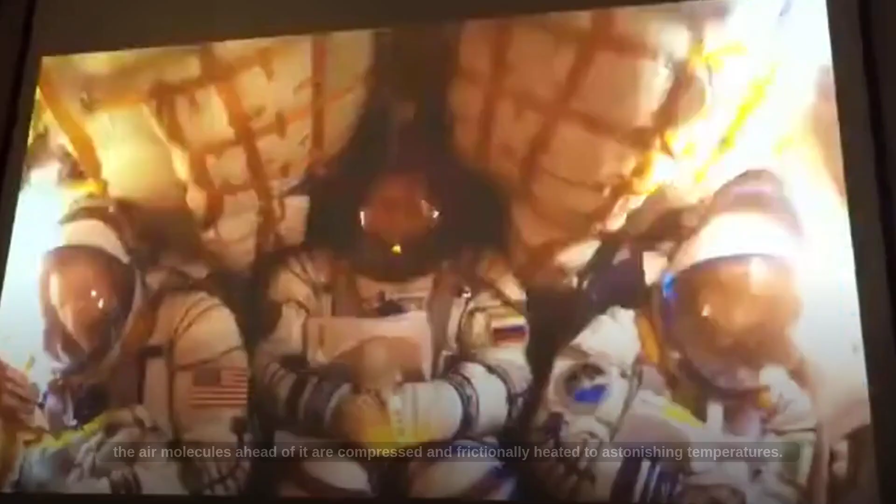Reaching such speeds is not just about raw power, it's about confronting an invisible, yet formidable, barrier: extreme heat. As an aircraft hurtles through the atmosphere at Mach 5, the air molecules ahead of it are compressed and frictionally heated to astonishing temperatures. This isn't just surface warmth, it's an intense thermal assault, capable of degrading and destroying conventional aircraft materials in mere moments. The air itself becomes a furnace.

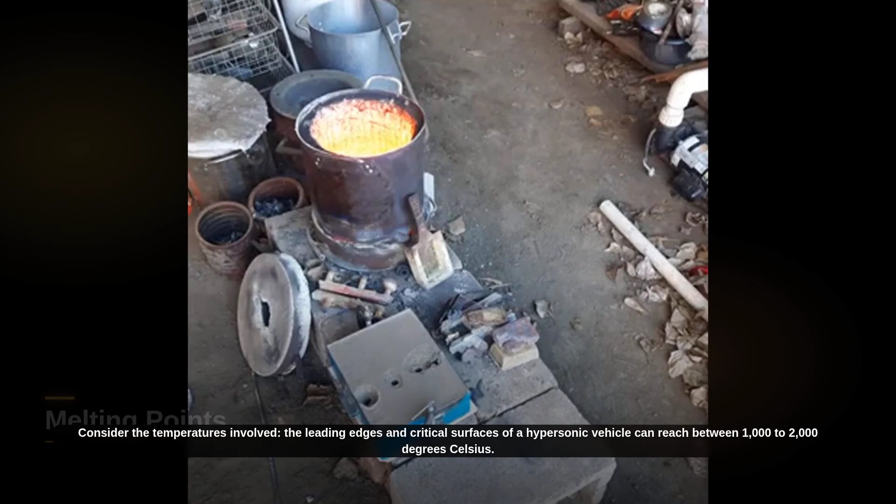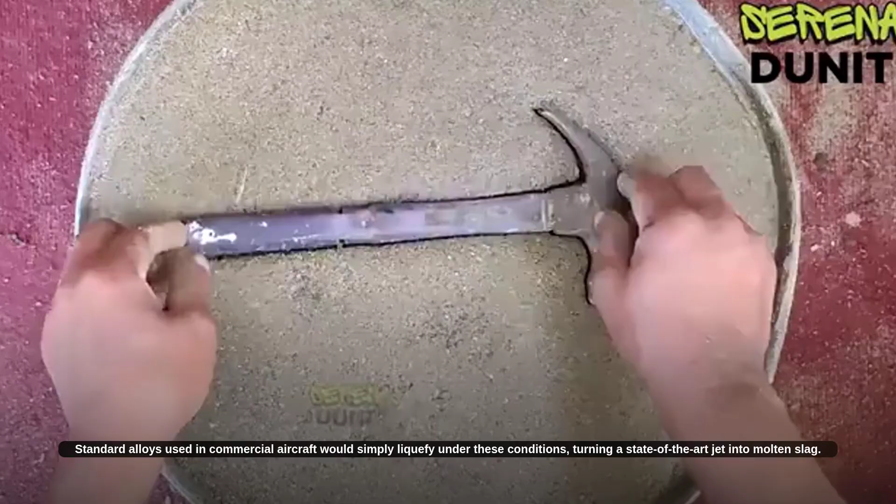Consider the temperatures involved. The leading edges and critical surfaces of a hypersonic vehicle can reach between 1,000 to 2,000 degrees Celsius. To put that in perspective, the melting point of steel is around 1,500 degrees Celsius, and aluminum, a common aerospace material, melts at about 660 degrees Celsius. Standard alloys used in commercial aircraft would simply liquefy under these conditions, turning a state-of-the-art jet into molten slag.

This extreme thermal environment means that designing a hypersonic vehicle is not just an incremental step from supersonic flight, it's a leap into an entirely new paradigm of engineering. Every component, every surface, must be conceived with this brutal thermal challenge in mind. Traditional aerodynamic shapes and materials are simply inadequate. It demands a rethinking of propulsion, structure, and material science from the ground up.

At the heart of sustained hypersonic flight lies an extraordinary engine concept, the supersonic combustion ramjet, or scramjet. Unlike conventional jet engines that use rotating compressor blades to squeeze incoming air, a scramjet has no moving parts. It relies entirely on the vehicle's immense forward speed to compress the air, a process known as ram compression. This elegant simplicity masks an incredible feat of engineering, operating at the very edge of physical possibility.

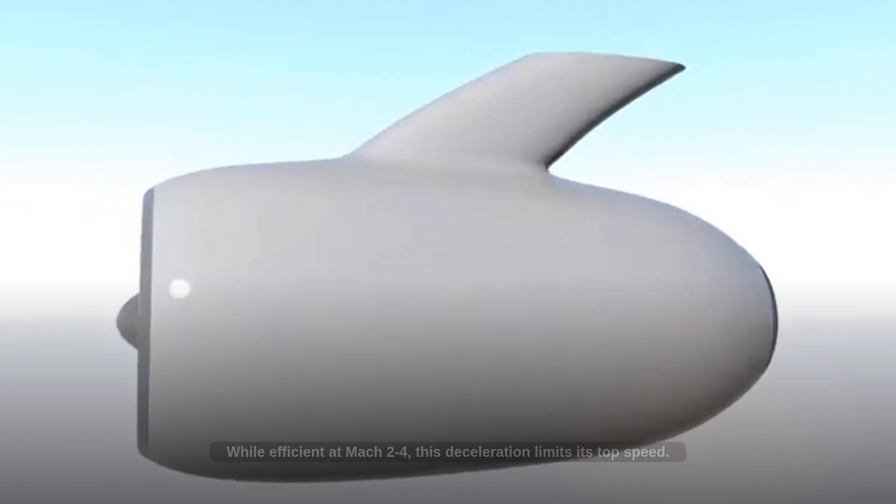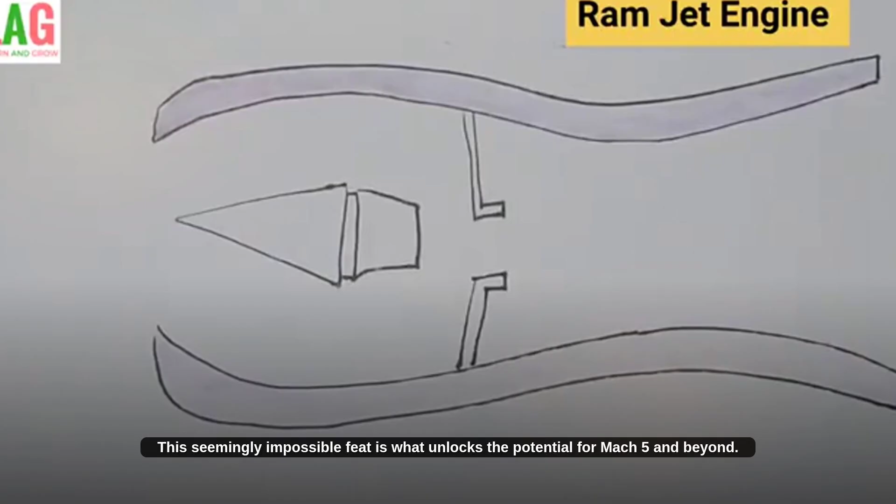To understand the scramjet, let's first consider its predecessor, the ramjet. A ramjet also uses ram compression, but crucially, it slows the incoming air to subsonic speeds before combustion. While efficient at Mach 2 to 4, this deceleration limits its top speed. The scramjet, however, takes this to the next level. It manages to burn fuel within a supersonic airflow. This seemingly impossible feat is what unlocks the potential for Mach 5 and beyond.

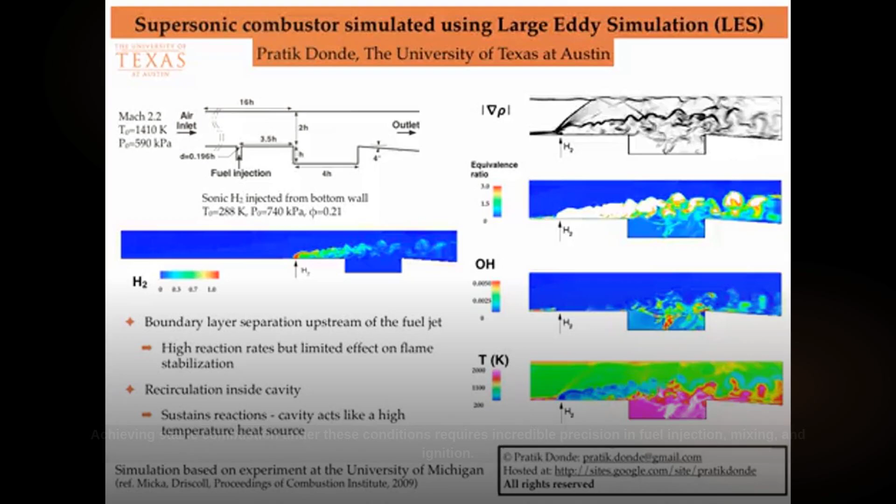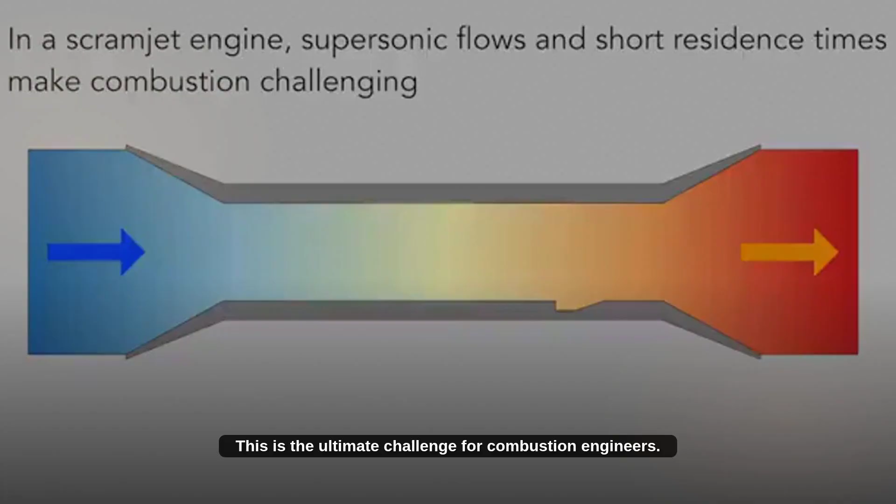Burning fuel in a flow moving faster than sound is akin to trying to light a match in a hurricane. The fuel and air are only in contact for milliseconds as they hurtle through the engine. Achieving stable combustion under these conditions requires incredible precision in fuel injection, mixing, and ignition. The flame must be held stable, preventing it from blowing out, even as the gases rush past at multiple times the speed of sound. This is the ultimate challenge for combustion engineers.

A scramjet engine works by cleverly integrating the engine into the airframe itself. The vehicle's forward motion forces air into a carefully shaped inlet, where it's compressed by shockwaves without slowing to subsonic speeds. Fuel, often hydrogen or a specialized hydrocarbon like JP-7, is then injected and ignited. The burning fuel expands rapidly, propelling the exhaust gases out a nozzle, generating immense thrust at hypersonic velocities. It's a continuous, supersonic chemical reaction.

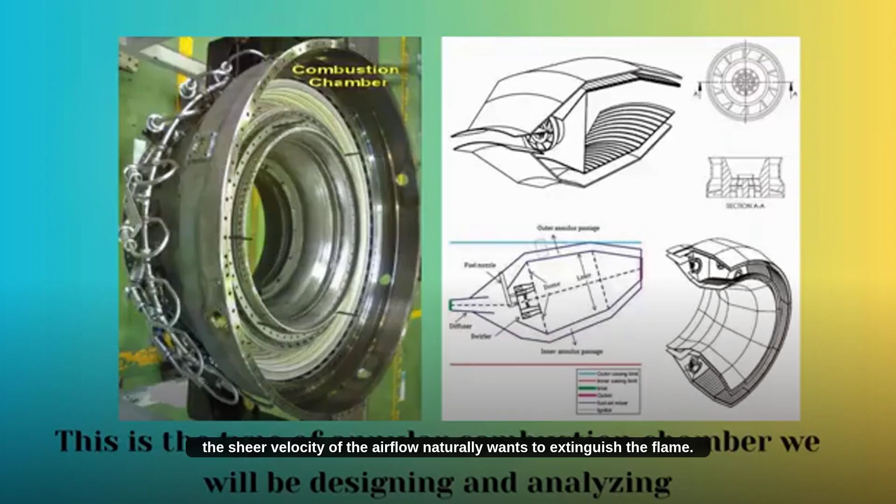One of the most persistent challenges in scramjet development is flame holding. Imagine trying to keep a candle lit on a speeding bullet. The sheer velocity of the airflow naturally wants to extinguish the flame. Engineers employ various strategies, like strategically placed cavities or ramps within the combustor, to create localized recirculation zones.

These zones act like tiny eddies, momentarily slowing the flow just enough for the fuel and air to mix and for the flame to stabilize and propagate upstream.

The extreme temperatures generated by hypersonic flight pose not just a structural challenge, but an opportunity. One ingenious thermal protection strategy, known as active cooling, leverages the very fuel powering the engine. Before it's injected into the combustor, the fuel, often a specialized type like JP7 or cryogenic hydrogen, is circulated through passages embedded in the hottest parts of the vehicle's structure and engine.

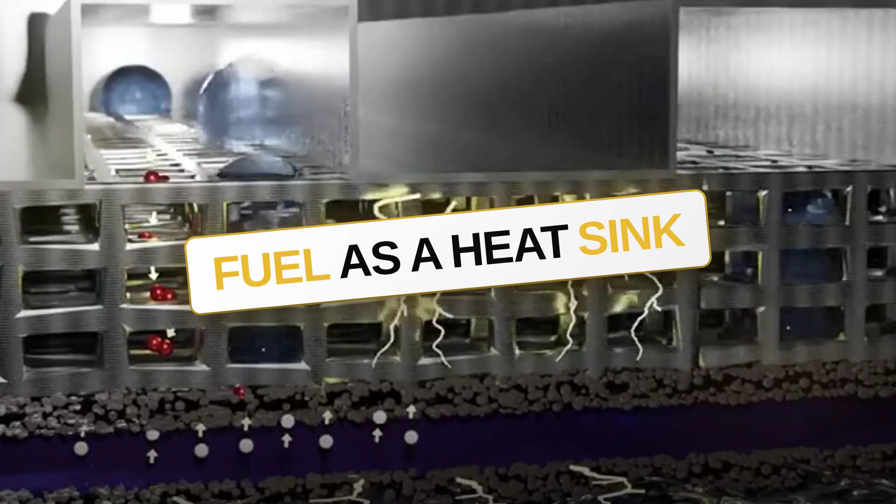The fuel absorbs this intense heat, acting as a crucial heat sink. This heat absorption isn't just about cooling, it also preheats the fuel. For certain hydrocarbon fuels like JP7, this preheating can cause a controlled chemical reaction known as cracking, where larger molecules break down into smaller, more reactive ones.

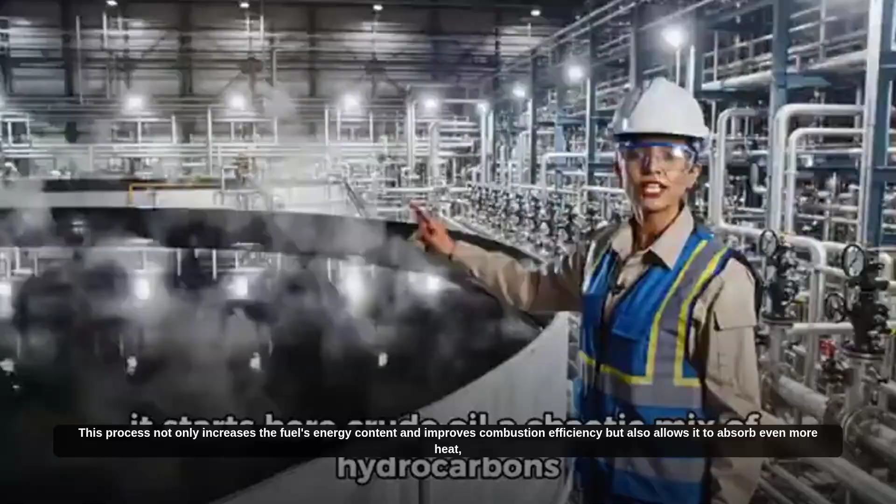This process not only increases the fuel's energy content and improves combustion efficiency but also allows it to absorb even more heat, making the system a dual-purpose marvel of thermal management and propulsion enhancement.

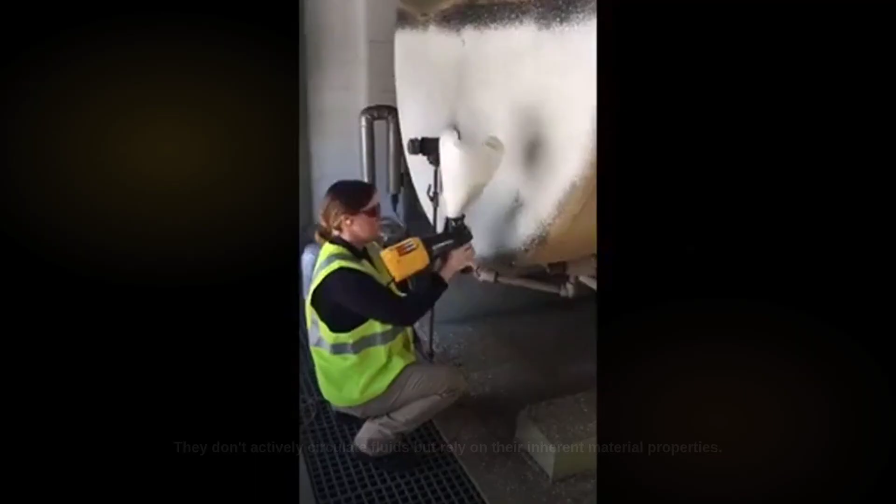Alongside active cooling, passive thermal protection systems are vital. These materials are designed to directly withstand or dissipate the extreme heat. They don't actively circulate fluids but rely on their inherent material properties. This category includes advanced ceramics, carbon-carbon composites, and ablative layers, each engineered to perform under conditions that would instantly vaporize conventional alloys. Their development represents a cutting-edge field of material science.

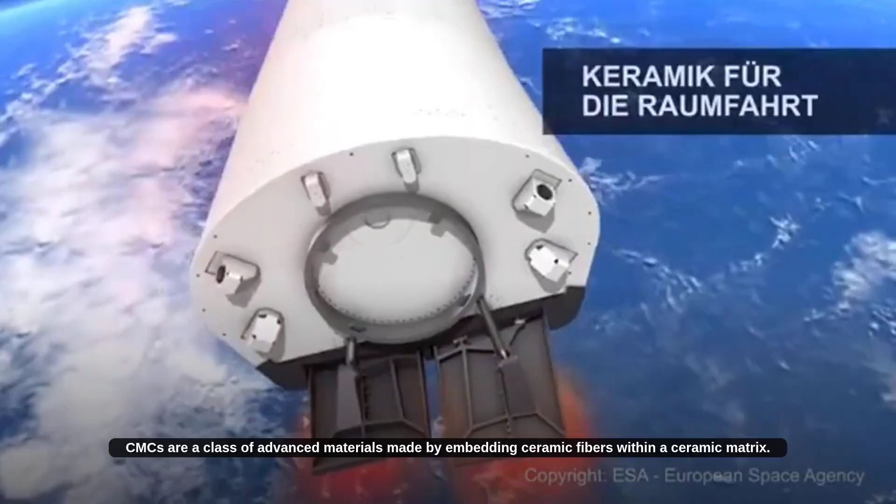One key innovation in passive thermal protection is the ceramic matrix composite, or CMC. CMCs are a class of advanced materials made by embedding ceramic fibers within a ceramic matrix. This combination offers exceptional strength-to-weight ratios and, crucially, maintains its structural integrity at temperatures exceeding 1,650 degrees Celsius, far beyond the capabilities of even the most robust superalloys. They are lightweight, rigid, and incredibly resilient to thermal shock.

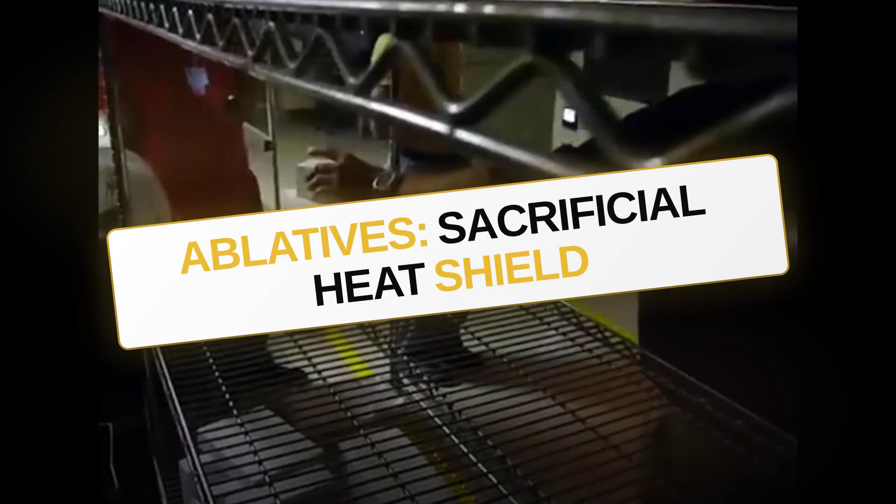Another critical passive defense is ablative materials. These are sacrificial layers designed to vaporize or char away when exposed to extreme heat, carrying thermal energy away from the underlying structure. As the outer layer of the ablative material heats up, it undergoes a phase change, sublimation or pyrolysis, absorbing vast amounts of heat in the process. This controlled erosion protects the core structure, similar to how a meteor's outer layer burns up during atmospheric entry.

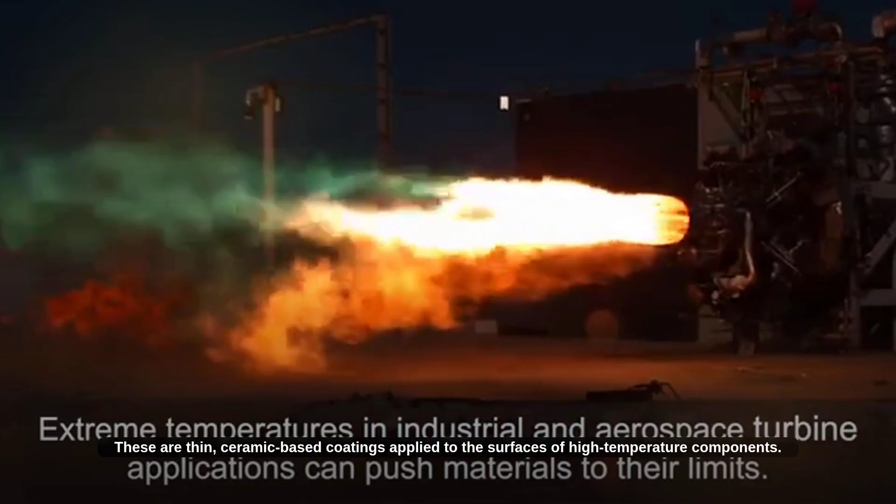Thermal barrier coatings, or TBCs, provide another layer of protection. These are thin, ceramic-based coatings applied to the surfaces of high-temperature components. TBCs act as an insulating layer, reducing the heat transfer from the hot gas stream to the underlying metal structure. This allows the structural components to operate at lower temperatures, increasing their lifespan and reliability. They are crucial for both engine hot sections and vehicle leading edges.

The challenge isn't just finding materials that can withstand the heat, but integrating them into a cohesive, functional airframe. This often means complex multi-layer designs, where different materials perform specific roles: an ablative outer layer, a CMC structural element underneath, and an active cooling system weaving through it all. The entire structure becomes a carefully orchestrated system of thermal defense and mechanical integrity, balancing weight, strength, and heat rejection.

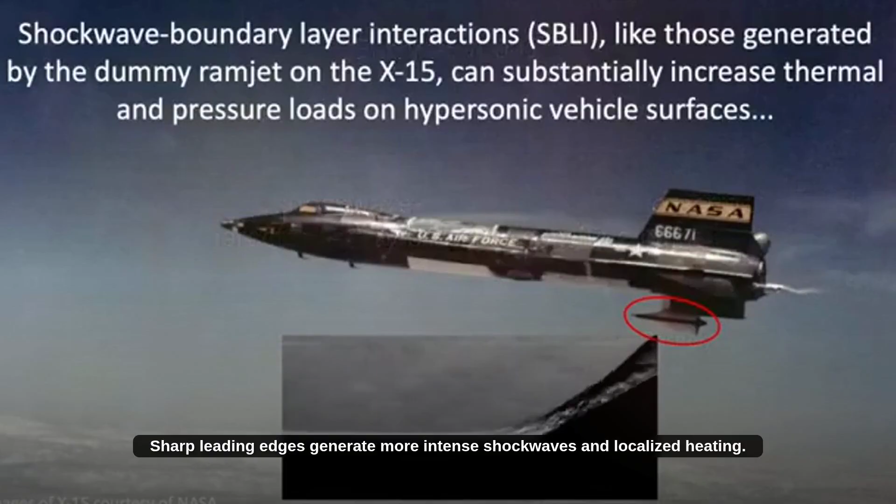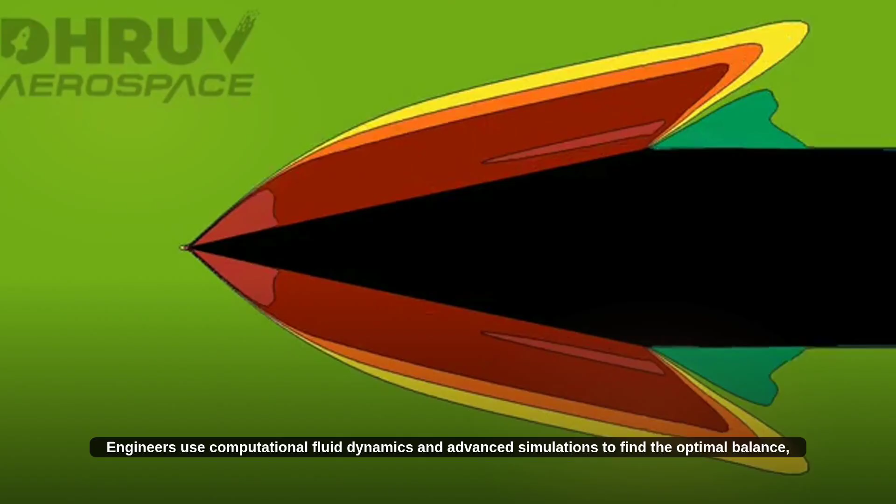The shape of a hypersonic vehicle is not merely for aesthetics or lift, it's meticulously sculpted to manage the severe aerodynamic heating. Sharp leading edges generate more intense shockwaves and localized heating. Blunt shapes, while creating more drag, can distribute heat over a larger area, reducing peak temperatures. Engineers use computational fluid dynamics and advanced simulations to find the optimal balance, shaping the vehicle to minimize thermal load while maximizing efficiency. A classic example of such aerodynamic shaping is the waverider concept.

A waverider is designed to literally ride its own shockwave, generating lift from the high-pressure air compressed beneath its unique, often wedge-shaped underside. This design minimizes drag and improves lift-to-drag ratio at hypersonic speeds, while also helping to manage the thermal environment by efficiently directing the superheated airflow away from critical surfaces. It's an elegant solution to complex problems.

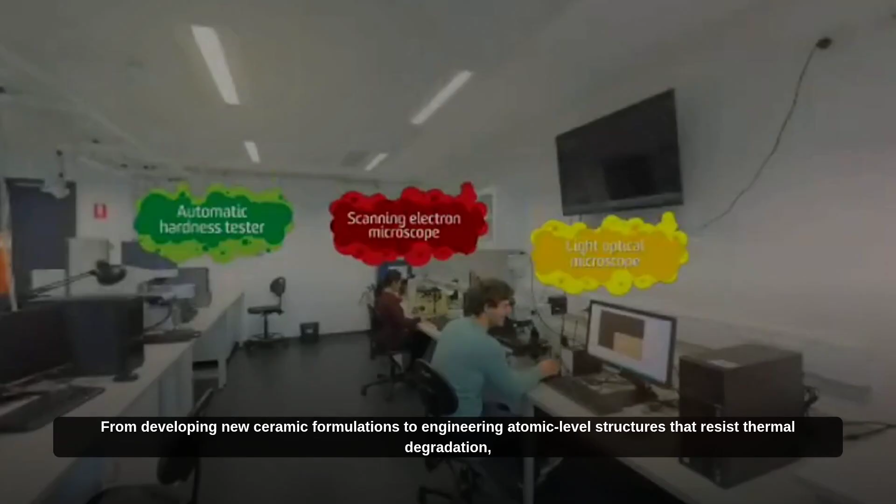The journey to hypersonic flight is, in many ways, a testament to the relentless progress in materials science. It's about creating substances that defy conventional understanding, materials that can retain strength and structural integrity while glowing red-hot. From developing new ceramic formulations to engineering atomic-level structures that resist thermal degradation, every breakthrough in the lab brings us closer to mastering the extreme environments of Mach 5 and beyond.

Developing these technologies requires extraordinary testing capabilities. Hypersonic wind tunnels, which simulate flight conditions at Mach 5+, are crucial. However, even these facilities have limitations, often running for only fractions of a second. Real-world flight tests are indispensable, pushing prototypes to their limits, gathering invaluable data on material performance, engine operation, and aerodynamic stability in authentic hypersonic environments.

Each test flight is a dangerous, yet essential, step forward. The relentless pursuit of hypersonic flight is driven by more than just scientific curiosity, it's a strategic imperative. The military implications of vehicles capable of Mach 5+ are profound, signaling a fundamental shift in global defense and offense.

The nation that masters this technology gains a decisive strategic advantage, capable of delivering strikes with unprecedented speed and unparalleled unpredictability. Two primary types of hypersonic weapons are under development: hypersonic glide vehicles, or HGVs, and hypersonic cruise missiles, HCMs. HGVs are launched by conventional ballistic missiles to high altitudes, then separate and glide back into the atmosphere at hypersonic speeds. Unlike traditional ballistic warheads, which follow predictable trajectories, HGVs can maneuver significantly during their atmospheric descent, making them exceptionally difficult to track and intercept.

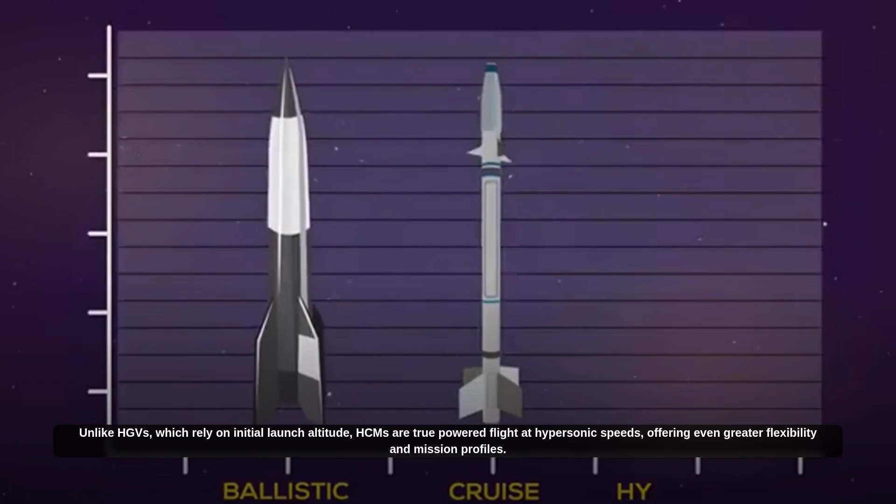Hypersonic cruise missiles, or HCMs, are different. They are powered by scramjet engines for sustained hypersonic flight within the atmosphere. This allows them to maintain Mach 5+ speeds for extended periods and, crucially, to maneuver throughout their entire flight path. Unlike HGVs, which rely on initial launch altitude, HCMs are true powered flight at hypersonic speeds, offering even greater flexibility in mission profiles.

For decades, missile defense systems have relied on the predictable, parabolic trajectories of intercontinental ballistic missiles. These weapons fly high into space and then re-enter the atmosphere along a well-defined path, giving radars and interceptors precious minutes to react. Hypersonic weapons shatter this predictability. Their ability to maneuver throughout their flight, combined with their extreme speed, fundamentally changes the calculus of missile defense.

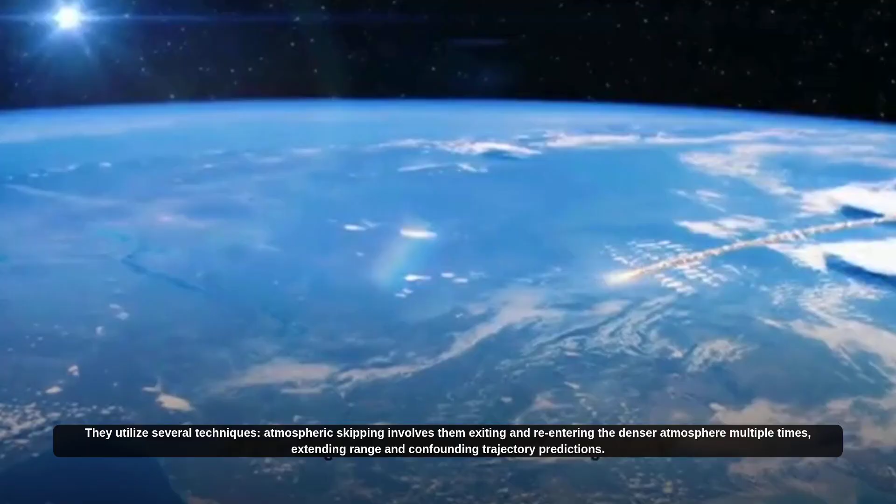How do hypersonic missiles achieve this unparalleled maneuverability? They utilize several techniques. Atmospheric skipping involves them exiting and re-entering the denser atmosphere multiple times, extending range and confounding trajectory predictions. Low-altitude flight reduces radar detection ranges, and continuous in-flight course adjustments make any projected impact point a moving target. These combined factors create an almost impossible challenge for existing defense systems.

Traditional missile defense radars are optimized to detect and track large, high-flying ballistic missile warheads from thousands of miles away. Hypersonic vehicles, however, fly lower, often within the upper atmosphere, and present a much smaller radar cross-section. The time available for detection, tracking, and interception is drastically reduced. By the time a hypersonic target is reliably detected, it may already be too close for any effective countermeasure.

The speed of hypersonic weapons compresses the decision-making cycle to mere minutes, if not seconds. A conventional ballistic missile launch might offer 20 to 30 minutes of warning. A hypersonic weapon could potentially strike a target thousands of miles away in less than 15 minutes. This severely limits the time for human commanders to assess a threat, consult, and issue launch orders for counter-responses, escalating the risk of miscalculation.

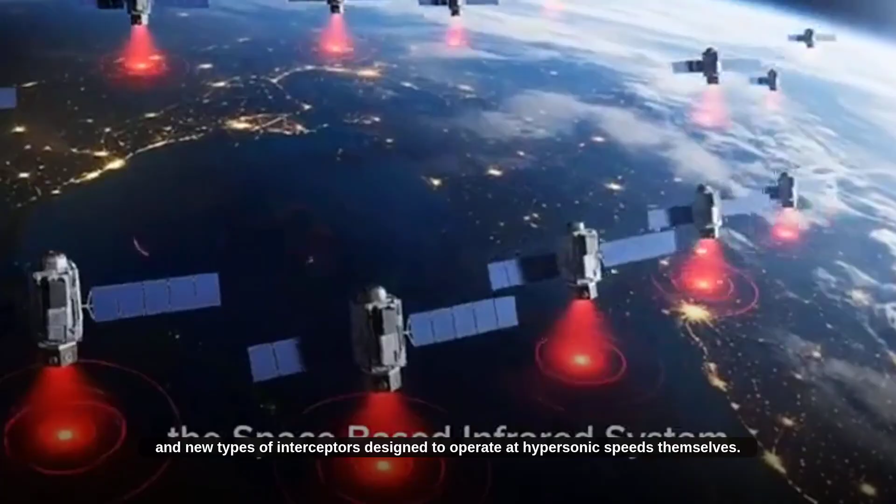To counter the hypersonic threat, entirely new defense paradigms are being explored. This includes advanced space-based sensor layers for persistent tracking from orbit, AI-driven command and control systems for rapid response, and new types of interceptors designed to operate at hypersonic speeds themselves. The race is on to develop defenses that can match the speed and agility of these groundbreaking offensive weapons.

The proliferation of hypersonic technology has profound global implications, potentially destabilizing existing power balances and accelerating a new arms race. Nations are investing heavily in research and development, understanding that mastery of hypersonic flight is not merely a technological achievement, but a geopolitical necessity. The strategic landscape is being redrawn by these advancements.

Despite the remarkable progress, significant engineering challenges persist in the pursuit of routine hypersonic flight. Sustaining scramjet combustion over a wide range of Mach numbers, improving engine durability, developing even more resilient thermal protection, and integrating complex systems into a reliable, cost-effective platform all require continued innovation. The path to truly operational hypersonic travel is still long and arduous.

While military applications currently dominate hypersonic research, the technology holds immense potential for civilian uses. Imagine flying from New York to Sydney in just a few hours, or launching satellites into orbit more efficiently. The advancements in materials, propulsion, and thermal management being pioneered for defense could eventually trickle down, revolutionizing commercial aviation and space access, transforming how we connect globally.

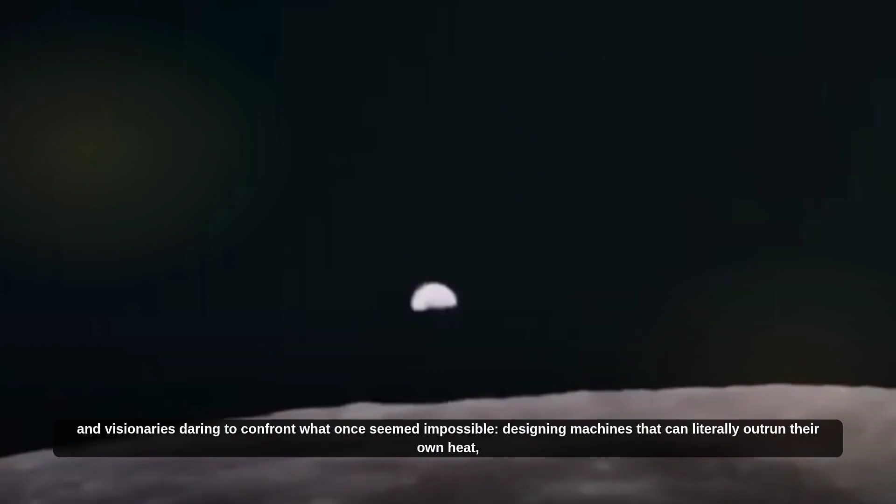The journey to Mach 5 and beyond is a testament to human ingenuity and perseverance. It's a story of engineers, scientists, and visionaries daring to confront what once seemed impossible, designing machines that can literally outrun their own heat, harnessing fire that burns faster than sound, and reshaping the very fabric of global strategy.

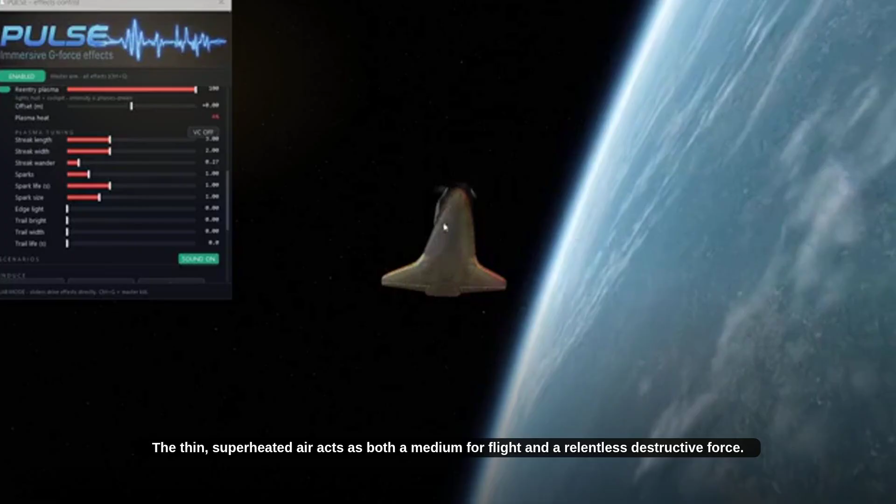Each challenge overcome pushes the boundaries of physics and engineering further. Every ounce of design, every material choice, every calculation is subjected to the ultimate test: the unforgiving environment of Earth's atmosphere at hypersonic speeds. The thin, superheated air acts as both a medium for flight and a relentless destructive force. Mastering this interaction requires a deep understanding of aerothermodynamics, a field that merges fluid dynamics, thermodynamics, and material science to predict and manage these extreme conditions.

What began as theoretical concepts and complex equations in academic papers has slowly, painstakingly transformed into tangible hardware. Experimental vehicles like the X-43 and X-51 Waverider have demonstrated sustained scramjet operation and hypersonic flight, validating decades of research. These groundbreaking test flights provide critical data, proving that what once existed only on paper can indeed soar through the sky at unimaginable speeds.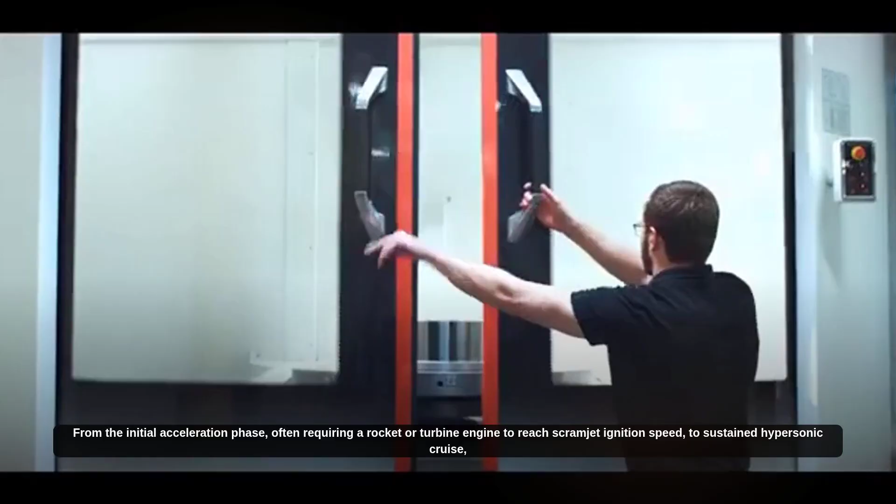The performance envelope of a scramjet engine is incredibly complex. It requires careful management of airflow, fuel-air ratio, and combustion stability across a wide range of altitudes and Mach numbers. From the initial acceleration phase, often requiring a rocket or turbine engine to reach scramjet ignition speed, to sustained hypersonic cruise, every stage demands precise control and optimization. The engine must seamlessly transition and adapt to changing conditions.

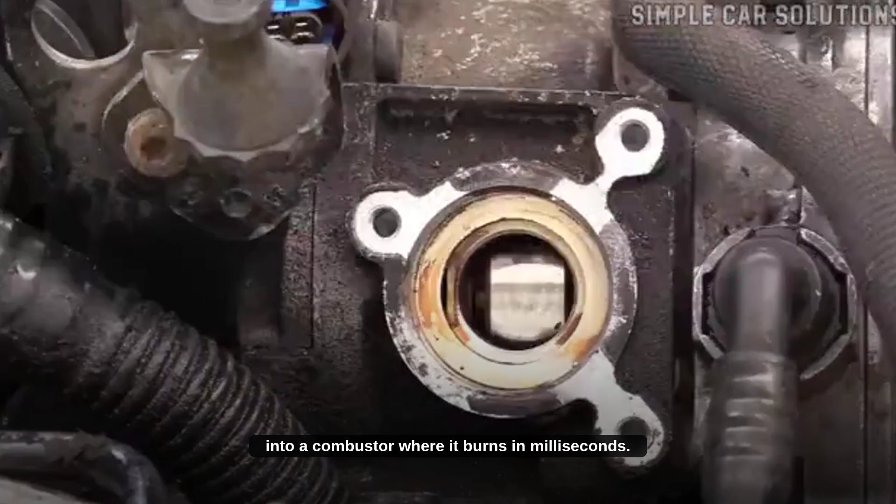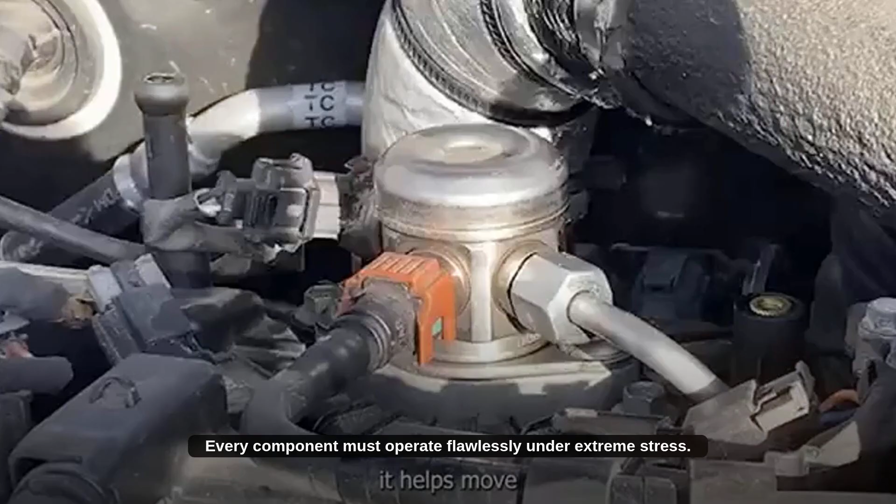The fuel system for a hypersonic vehicle is far more intricate than that of a conventional aircraft. It must deliver fuel at extremely high pressures and precise rates, often through actively cooled lines, into a combustor where it burns in milliseconds. Managing fuel density, temperature, and flow dynamics is critical, especially when the fuel itself is performing a dual role as a coolant. Every component must operate flawlessly under extreme stress.

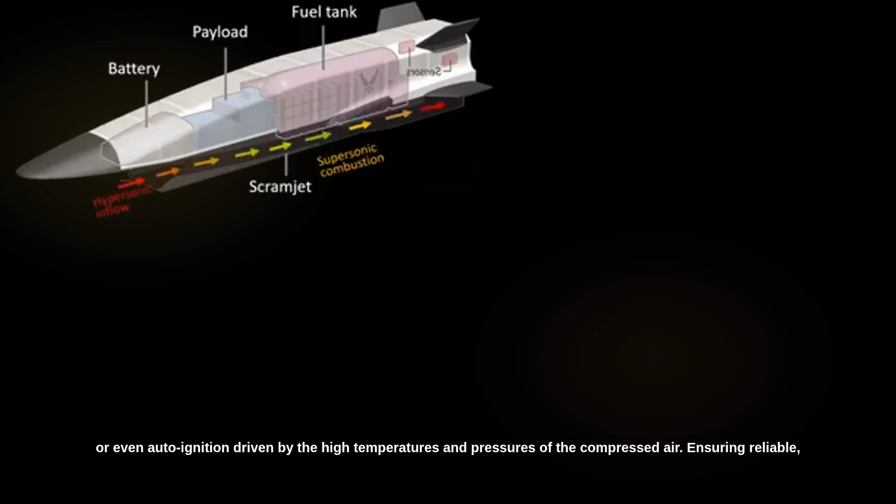Igniting fuel in a supersonic airstream is inherently difficult. Unlike a conventional engine that might use a spark plug, scramjets often rely on pilot flames, catalytic surfaces, or even auto-ignition driven by the high temperatures and pressures of the compressed air. Ensuring reliable, rapid ignition and then stabilizing that flame against the overwhelming force of the airflow are critical hurdles that determine the engine's operational success.

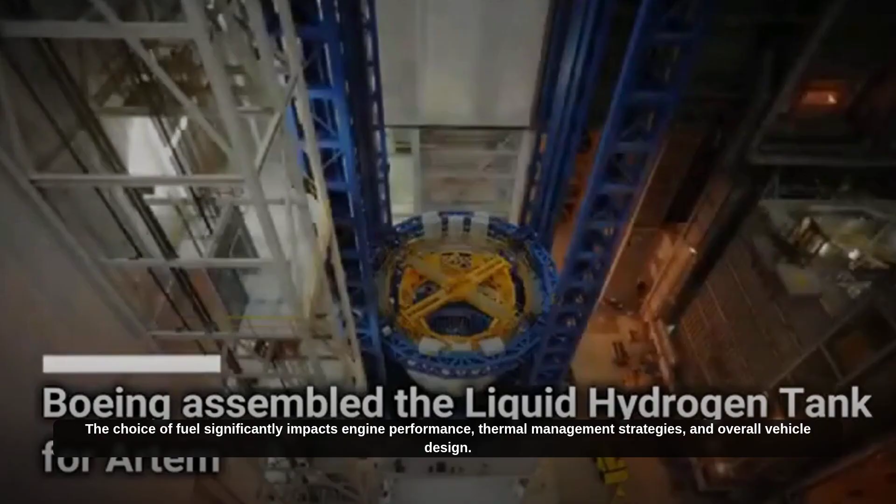While hydrogen and JP7 have been the primary fuels for scramjet development due to their high energy density and cooling capabilities, research continues into other advanced propellants. Future hypersonic vehicles may utilize alternative hydrocarbon fuels, or even more exotic propellants, tailored to specific mission profiles or engine designs. The choice of fuel significantly impacts engine performance, thermal management strategies, and overall vehicle design.

The design and optimization of hypersonic vehicles and scramjets heavily rely on advanced computational power. Computational fluid dynamics, or CFD, simulations allow engineers to model complex airflow patterns, shockwave interactions, and combustion processes in extreme detail, often before any physical prototype is built. This virtual testing drastically reduces development time and costs, enabling rapid iteration and refinement of designs that would be impossible with physical testing alone.

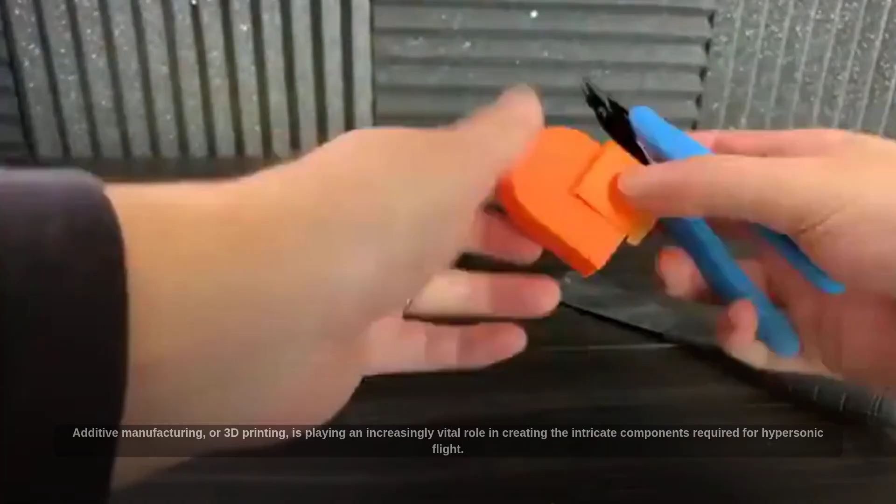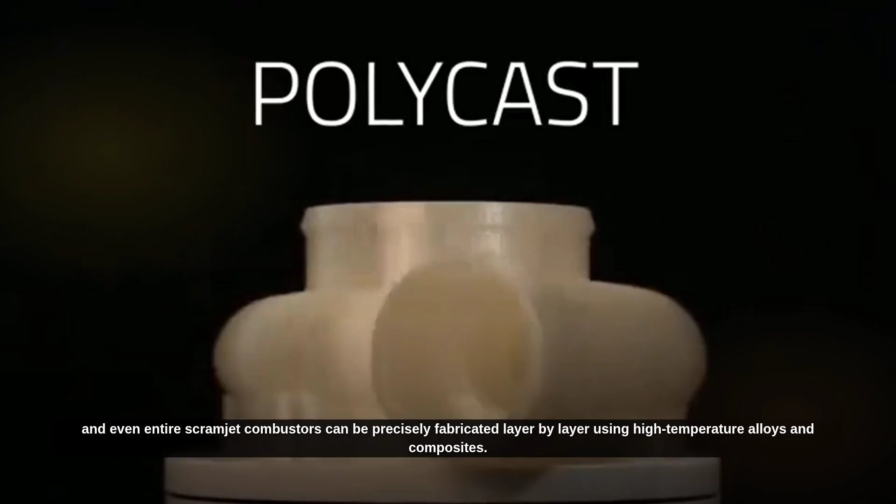Additive manufacturing, or 3D printing, is playing an increasingly vital role in creating the intricate components required for hypersonic flight. Complex cooling channels, lightweight structural elements with optimized geometries, and even entire scramjet combustors can be precisely fabricated layer by layer using high-temperature alloys and composites. This technology allows for designs that were previously impossible to manufacture, pushing the boundaries of what's physically achievable.

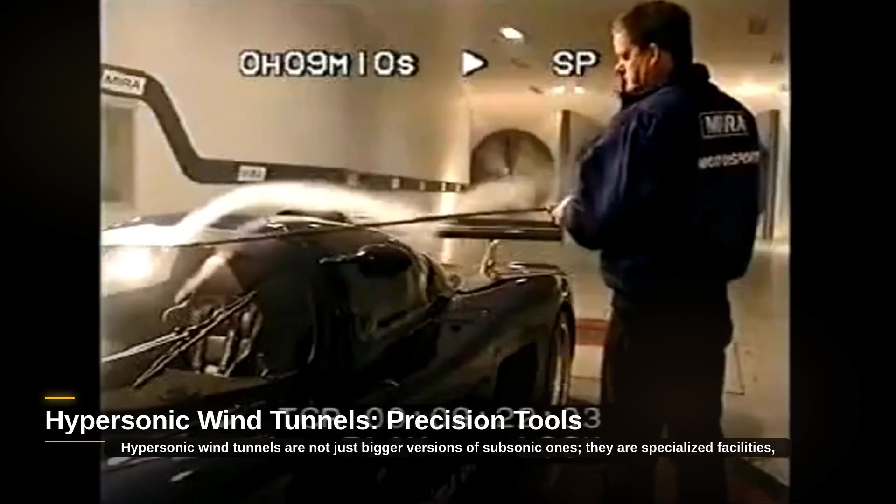Hypersonic wind tunnels are not just bigger versions of subsonic ones, they are specialized facilities, often using high-pressure gas reservoirs and expansion nozzles to create the necessary Mach numbers and temperature conditions. Many operate as blowdown tunnels, where gas is released from a high-pressure tank through the test section, allowing only short test durations. These precision tools are indispensable for gathering data on aerodynamics, heating, and material responses.

For ablative materials, predicting and managing the ablation rate is crucial. Too fast, and the vehicle's structural integrity is compromised prematurely; too slow, and it won't shed enough heat. Engineers use sophisticated models and test data to understand how these materials char and vaporize under specific thermal loads. The goal is a controlled, predictable ablation that ensures the vehicle survives its fiery journey while remaining structurally sound.

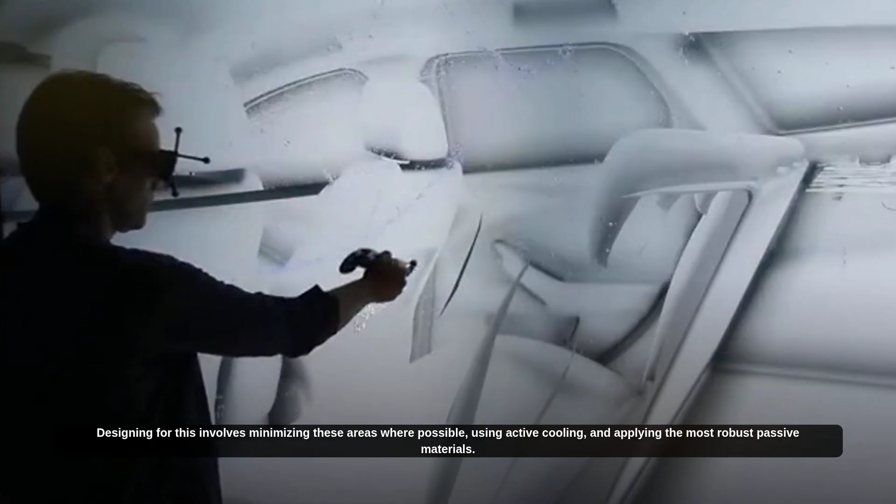Heat flux, the rate of heat energy transfer per unit area, is incredibly high at hypersonic speeds, especially at leading edges and stagnation points. Designing for this involves minimizing these areas where possible, using active cooling, and applying the most robust passive materials. Managing this intense energy flow is a primary driver for the overall vehicle shape and material selection, ensuring that no single point becomes a catastrophic weak link.

Beyond heating, hypersonic flight introduces unique aerodynamic stability challenges. The air at these speeds behaves differently, and the shockwaves generated can interact with control surfaces in complex, sometimes unpredictable ways. Maintaining stable flight and precise maneuverability requires sophisticated flight control systems, advanced sensors, and often, aerodynamic designs that are inherently stable at hypersonic velocities, a careful balance of form and function.

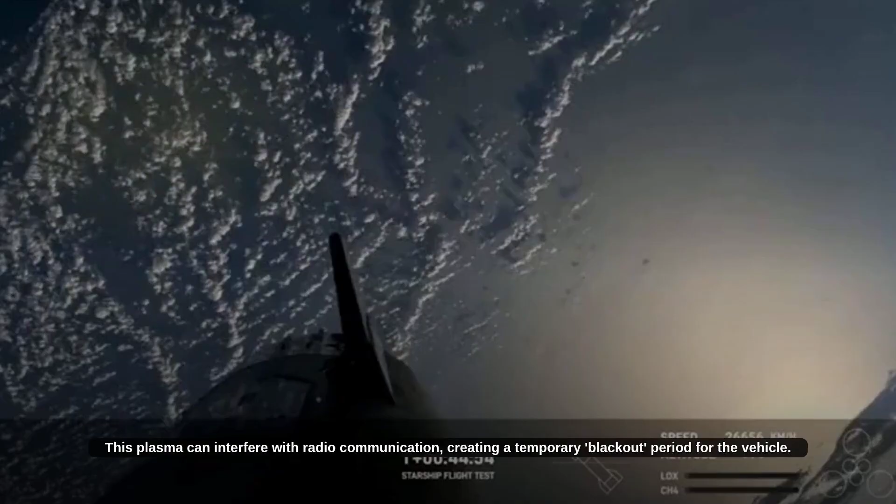At extreme hypersonic speeds, the air around the vehicle can become ionized, forming a superheated plasma sheath. This plasma can interfere with radio communication, creating a temporary blackout period for the vehicle. Mitigating this effect requires innovative antenna designs and communication protocols that can punch through or bypass the plasma layer. It's yet another layer of complexity that must be addressed for practical hypersonic operations.

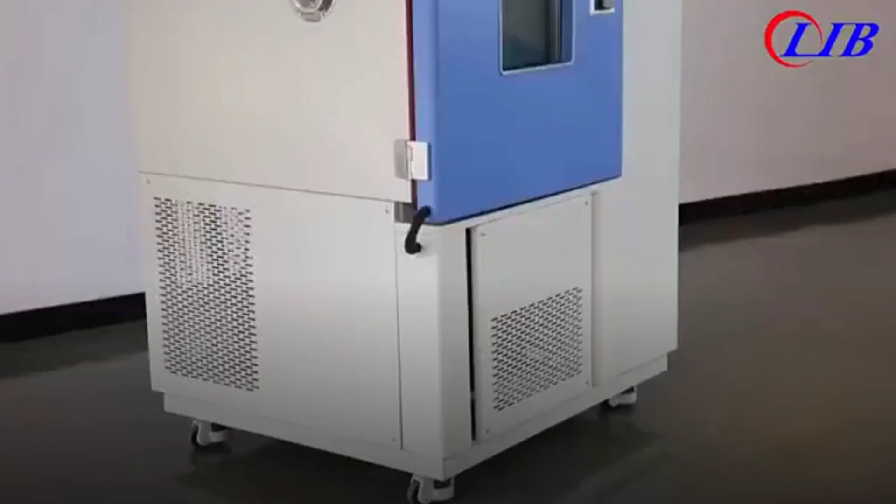Hypersonic vehicles endure not only extreme heat but also rapid and dramatic thermal cycling, from ambient temperatures on the ground to thousands of degrees Celsius in flight, and then back again. This constant expansion and contraction puts immense stress on materials and joints, potentially leading to fatigue and structural failure over time. Designing for longevity and repeated use requires materials that can withstand these repeated, extreme thermal shocks without degradation.

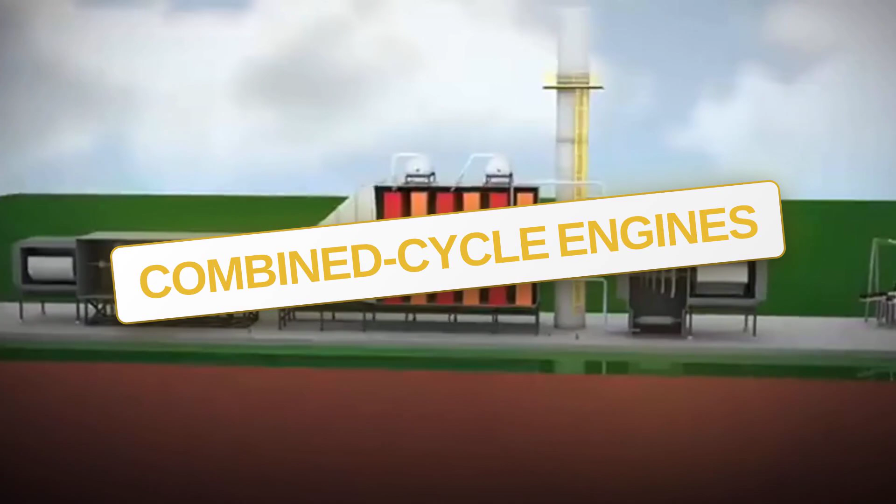Beyond scramjets, researchers are exploring even more advanced propulsion concepts for speeds well beyond Mach 5. Combined cycle engines, which might integrate turbine, ramjet, and scramjet modes into a single system, could offer seamless acceleration from takeoff to orbit. Pulsed detonation engines and even nuclear propulsion are also theoretical possibilities, pushing the limits of speed and range further than ever imagined.

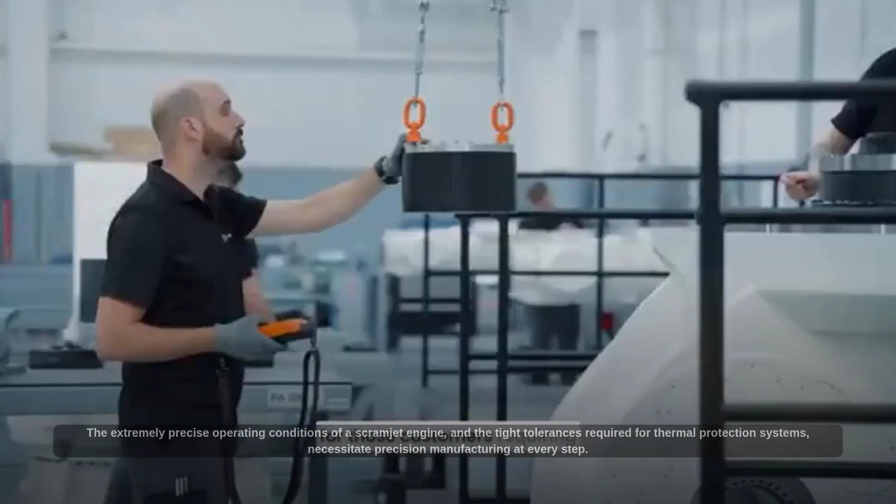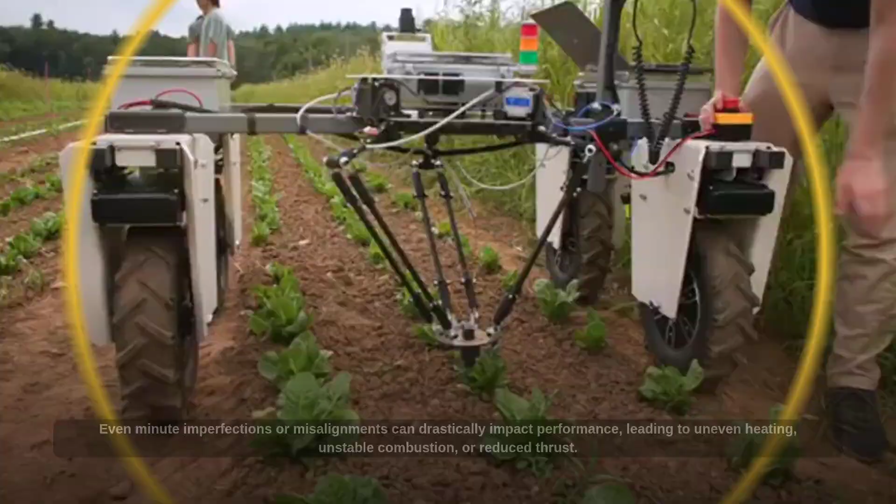The extremely precise operating conditions of a scramjet engine, and the tight tolerances required for thermal protection systems, necessitate precision manufacturing at every step. Even minute imperfections or misalignments can drastically impact performance, leading to uneven heating, unstable combustion, or reduced thrust. Robotics, advanced machining, and meticulous quality control are integral to building these cutting-edge machines.

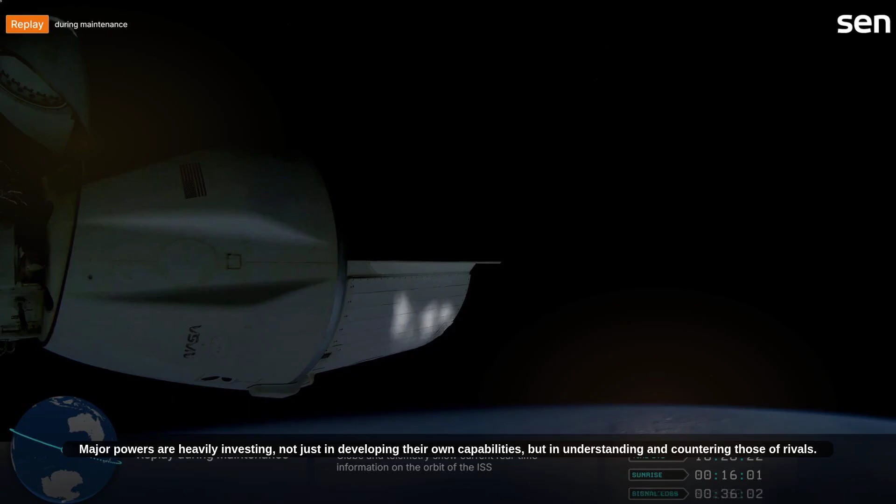The engineering marvels of hypersonic flight are now central to a global race for strategic dominance. Major powers are heavily investing, not just in developing their own capabilities, but in understanding and countering those of rivals. This intense competition accelerates innovation, but also raises complex questions about international stability, arms control, and the potential for a new era of strategic uncertainty.

As with any transformative military technology, hypersonic flight presents significant ethical considerations. The speed and unpredictability of these weapons reduce reaction times, increasing the risk of preemptive strikes or accidental escalation. Ensuring global stability in this new era will require careful diplomacy, transparency, and potentially new international agreements to manage the risks associated with such game-changing capabilities.

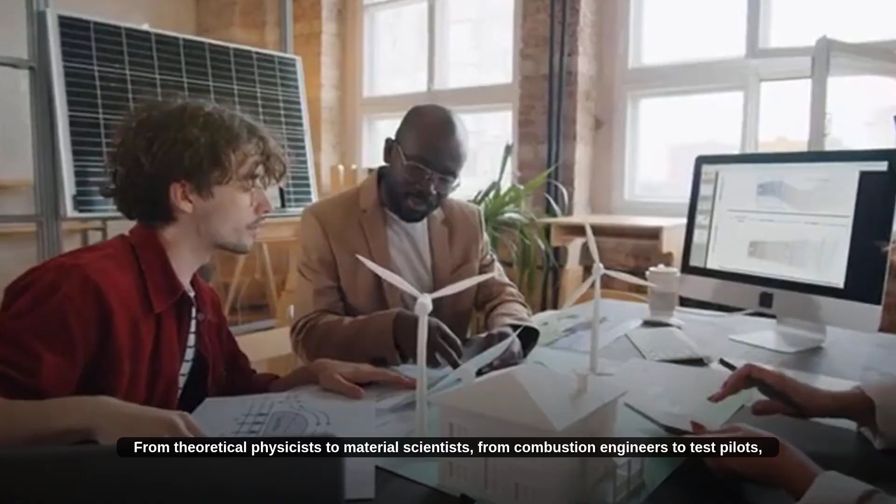Behind every technological leap are the dedicated individuals pushing the boundaries of what's possible. From theoretical physicists to material scientists, from combustion engineers to test pilots, thousands of brilliant minds contribute to the seemingly impossible feat of hypersonic flight. Their collective determination, intellect, and courage define this era of unparalleled innovation, transforming our understanding of physics and engineering.

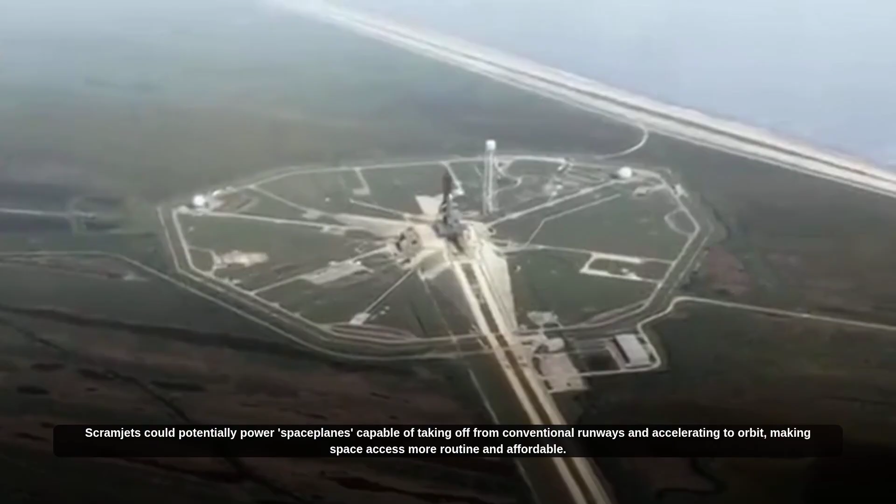The technologies developed for hypersonic atmospheric flight also lay crucial groundwork for future space exploration. Scramjets could potentially power spaceplanes capable of taking off from conventional runways and accelerating to orbit, making space access more routine and affordable. The extreme thermal management and propulsion systems are directly applicable to spacecraft re-entry and high-speed planetary atmospheric entry, unlocking new frontiers beyond Earth.

Beyond passengers, hypersonic technology could also revolutionize global cargo transport. Imagine delivering urgent medical supplies or high-value goods to any point on the planet within hours. This would redefine logistics, supply chains, and disaster response. The sheer speed offers unparalleled responsiveness, though the economic viability and environmental impact of such systems remain significant considerations for the future.

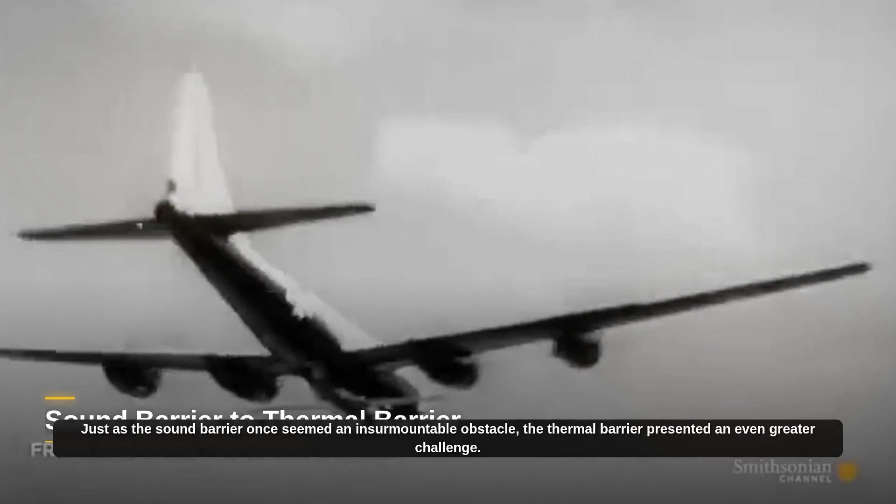Just as the sound barrier once seemed an insurmountable obstacle, the thermal barrier presented an even greater challenge. Yet, through relentless innovation in materials, propulsion, and aerodynamics, humanity is now systematically dismantling this barrier. The journey from subsonic to supersonic, and now to hypersonic, is a continuum of pushing against perceived limits, redefining the boundaries of what physics allows.

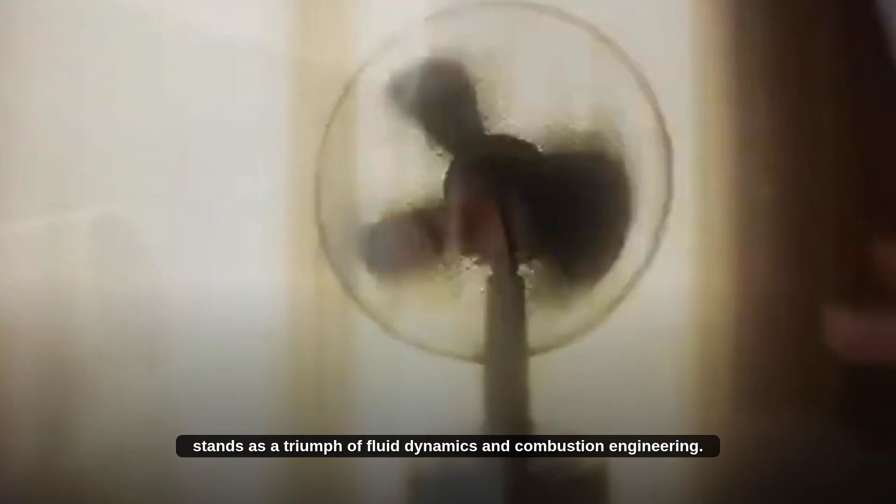The scramjet engine, a device with no moving parts yet capable of generating immense power at Mach 5+, stands as a triumph of fluid dynamics and combustion engineering. Its elegance lies in its simplicity of form, contradicted by the incredible complexity of its operation. It embodies the essence of hypersonic flight, harnessing extreme forces of nature for controlled, powerful motion, pushing the very definition of what an engine can be.

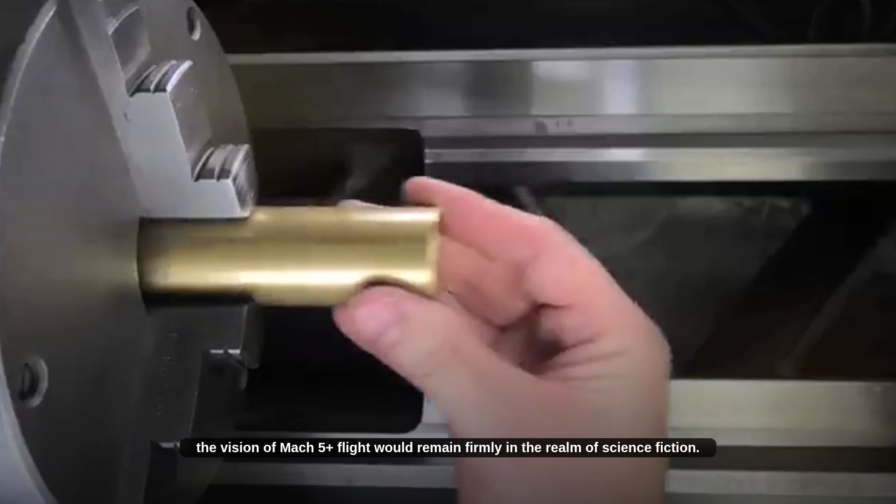While scramjets provide the thrust, the materials are the unsung heroes of hypersonic flight, bearing the brunt of the atmospheric inferno. Without the development of robust ceramic matrix composites, ablative coatings, and intelligent active cooling systems, the vision of Mach 5+ flight would remain firmly in the realm of science fiction. These advanced materials are foundational, a silent testament to human ingenuity.

The advent of maneuverable hypersonic weapons has opened a new chapter in strategic warfare, effectively redrawing the global chessboard. Nations must now adapt their defense doctrines, invest in new technologies, and reconsider their alliances in light of these capabilities. The speed and unpredictability introduce a new dynamic, shifting the emphasis from brute force to rapid, precise, and elusive strikes, challenging existing notions of deterrence.

The journey to Mach 5 and beyond is not merely about faster vehicles, it's a profound demonstration of humanity's capacity for innovation. It embodies the spirit of scientific inquiry, engineering excellence, and the courage to tackle problems of unprecedented scale. The lessons learned, the technologies developed, and the understanding gained will resonate far beyond the immediate applications, shaping our future in countless, unforeseen ways. The quest for ultimate speed continues.

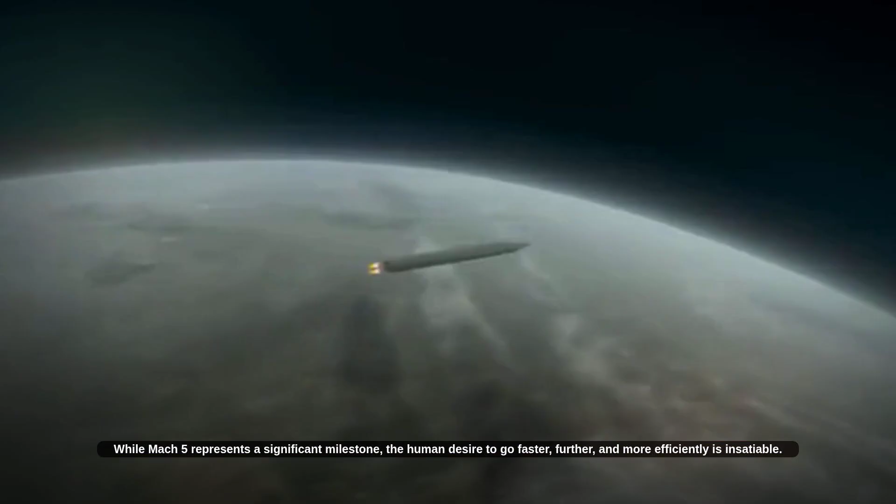While Mach 5 represents a significant milestone, the human desire to go faster, further, and more efficiently is insatiable. Future generations of engineers and scientists will push beyond current boundaries, seeking even greater understanding and control over extreme physics. The era of hypersonic flight is not an endpoint, but a new beginning in humanity's endless pursuit of mastery over motion.

As hypersonic technology matures, the international community faces the critical challenge of balancing its strategic implications with the imperative for global peace and stability. The dual-use nature of these advancements, offering both unprecedented defense capabilities and potentially devastating offensive power, demands thoughtful deliberation and cooperative solutions. The responsibility rests on us to guide this powerful technology towards a safer future.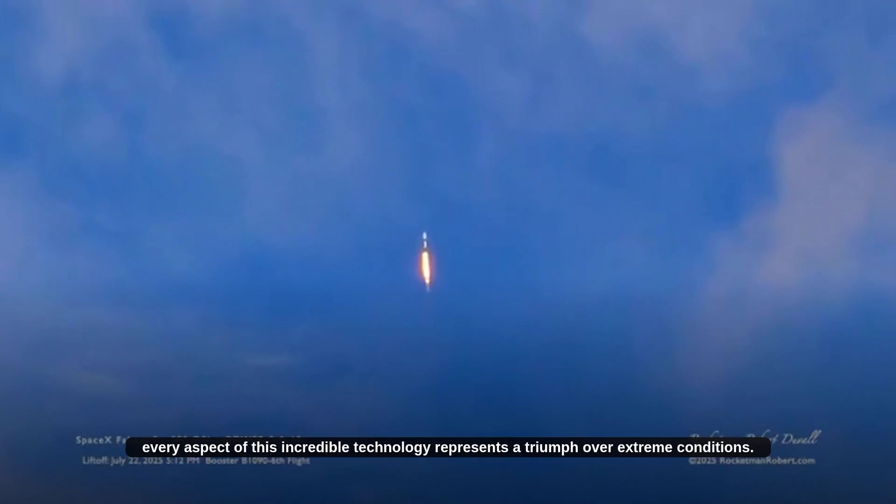From the intricate blueprints of a scramjet engine to the shimmering plasma trails of a hypersonic glide vehicle, every aspect of this incredible technology represents a triumph over extreme conditions. It's a journey from theoretical limits to physical reality, a testament to what is achievable when human ambition meets scientific rigor. The sky, once thought boundless, now presents a new, fiery frontier to be conquered.

The lessons learned from Mach 5 Plus flight are already inspiring the next generation of engineers and innovators. Students are delving into advanced fluid dynamics, pioneering new materials, and exploring novel propulsion concepts. The legacy of hypersonic development will not only be faster aircraft but also a richer understanding of fundamental physics and a renewed sense of possibility for what humanity can achieve.

The development of scramjet technology has been a global scientific and engineering effort, with contributions from numerous nations, research institutions, and aerospace companies. This collaborative, yet competitive, environment has accelerated progress, pooling expertise and resources to overcome the monumental challenges. The shared pursuit of this high-speed frontier underscores the universal human drive to explore and innovate.

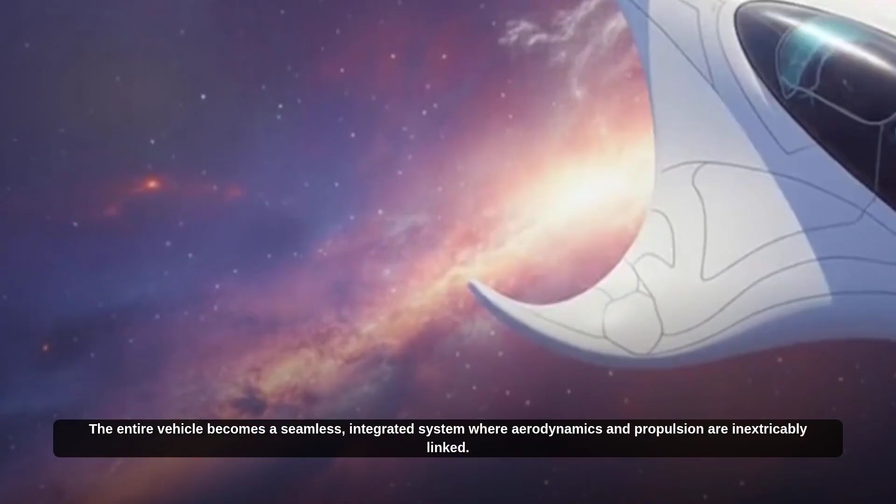Perhaps the most profound realization in hypersonic flight is that the airframe itself is an integral part of the engine. The entire vehicle becomes a seamless, integrated system where aerodynamics and propulsion are inextricably linked. The surfaces that generate lift and control are also shaping the airflow for combustion, a testament to the holistic design philosophy required to master these extreme speeds.

Pushing the boundaries of physics comes with a significant cost, not just in financial investment, but in intellectual capital and the sheer difficulty of the task. Hypersonic programs are multi-decade endeavors, requiring sustained commitment, massive resources, and the acceptance of risk. Yet, the potential strategic advantages and revolutionary civilian applications are seen by many as a worthy return on this immense investment.

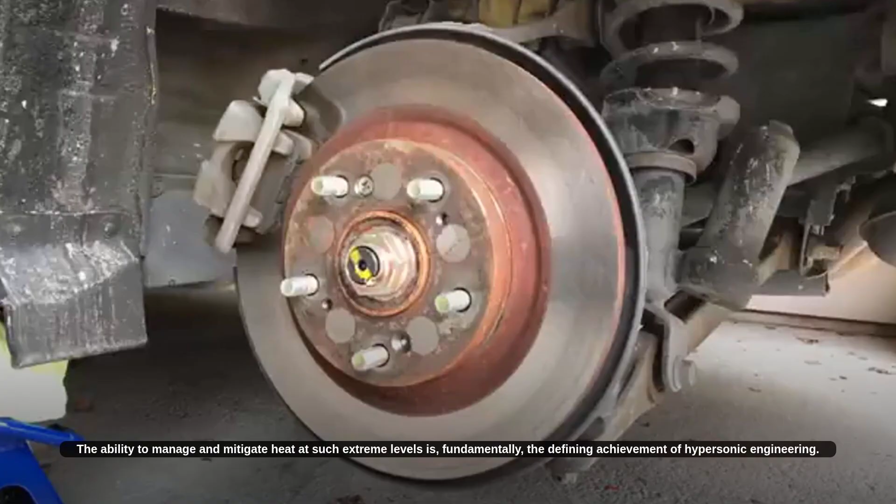From the first moments of acceleration to sustained cruise, and even during eventual deceleration, heat remains the constant adversary in hypersonic flight. Every solution, from active cooling to ablative shields, is a direct countermeasure against this omnipresent thermal force. The ability to manage and mitigate heat at such extreme levels is, fundamentally, the defining achievement of hypersonic engineering.

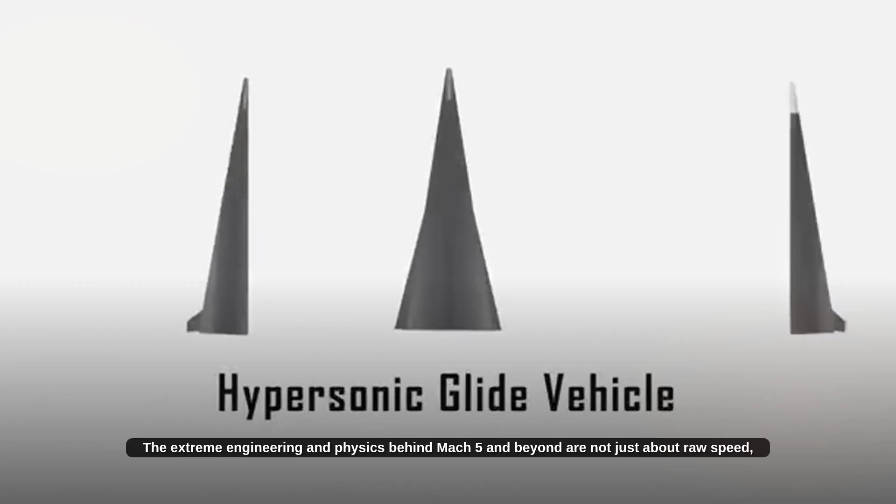The journey into hypersonic flight has opened a breathtaking new chapter in the history of aerospace. It's a realm where the impossible becomes tangible, where the very air we breathe transforms into both fuel and foe. The extreme engineering and physics behind Mach 5 and beyond are not just about raw speed, but about a deeper understanding of our universe and our own boundless capacity for innovation.